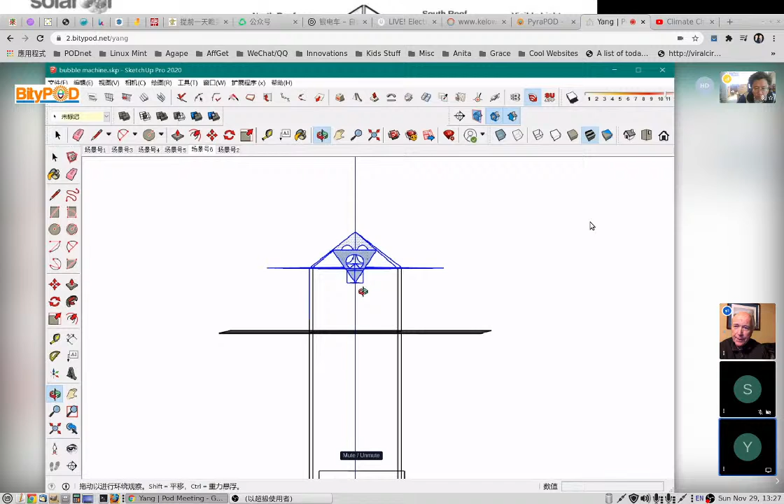I'm ready to go. We ready to continue? Okay, we're gonna do details now. So, Yang, what I'd like to do is copy the structure, everything we see, make a whole copy of it, and if you take the whole column, it doesn't matter. We'll clip it later. Capture everything and the columns. Let's make a copy of it and put it beside. Don't do anything else yet. Just make a copy.

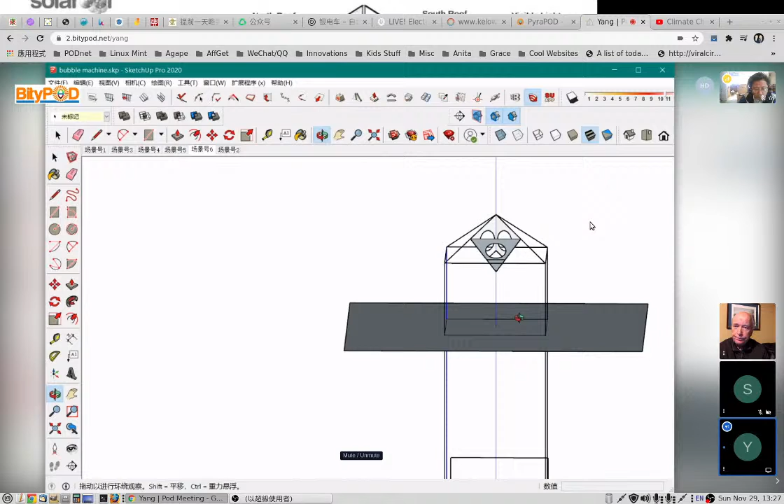If you want to trim it there, that's fine, but only to make a copy, right? We're not going to actually trim anything. I want to keep the original model too. I don't want to undo anything. So if you capture the columns, we can trim them later. Yeah, that's it. Put them over by the side.

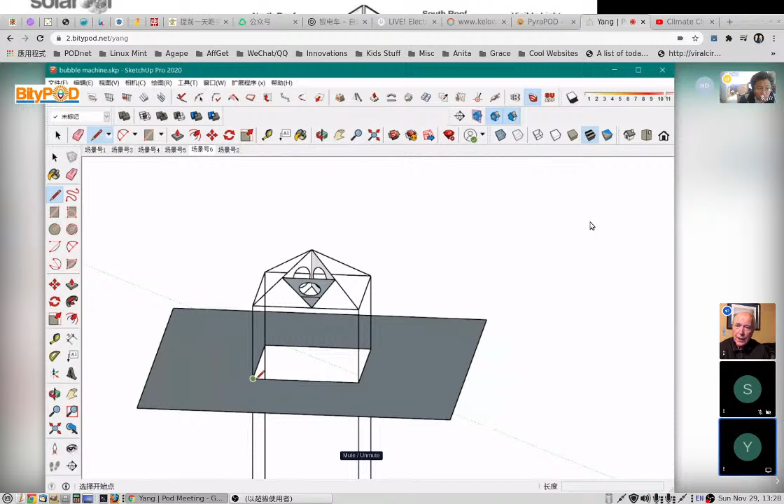Now you can trim where they pass, down past that plane, so the plane would now have a hole in it or anything. Yeah, that's it. We'll just crop the column length so that's all above. So that would now be the floor, right? This is like a table sitting on the floor. So this is the floor? Yep, that'll become a floor that we're standing on while we do this work. We have a little rig, a little experiment, an experimental bench. It's like a bench.

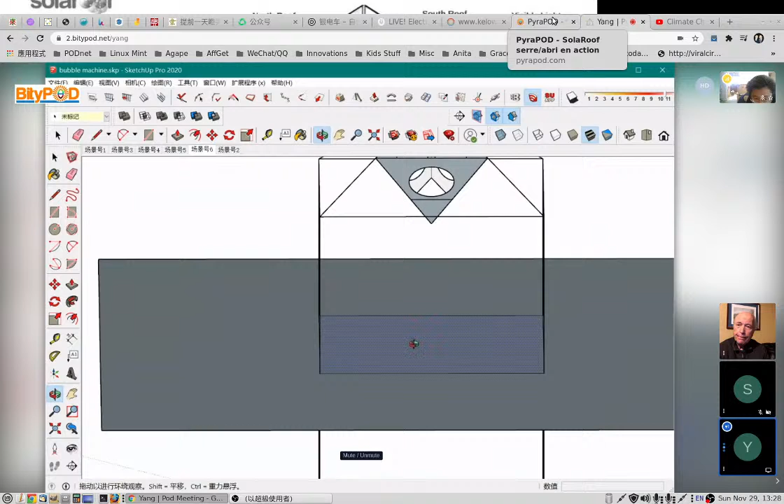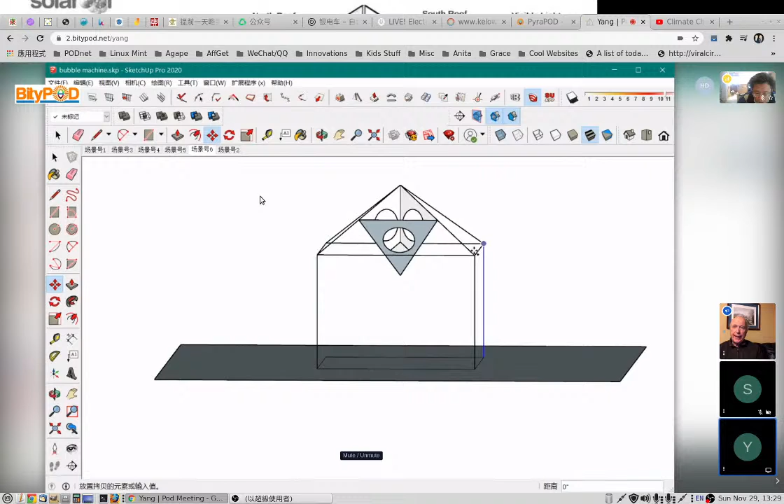Let me erase this first. Okay, we can just extend legs. We could actually give a material now to those legs. Let's make those legs angles, 2 by 2 by 1/8 angle. So like this? Yep. 1/8 thick, 2 inch by 2 inch. 1 inch less.

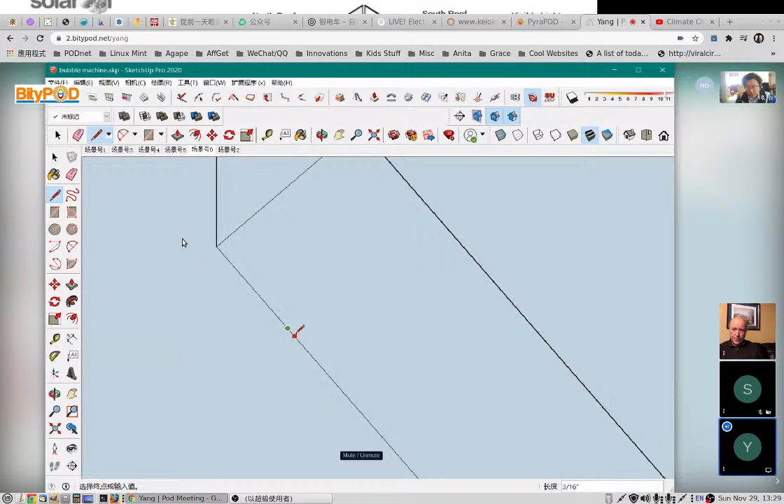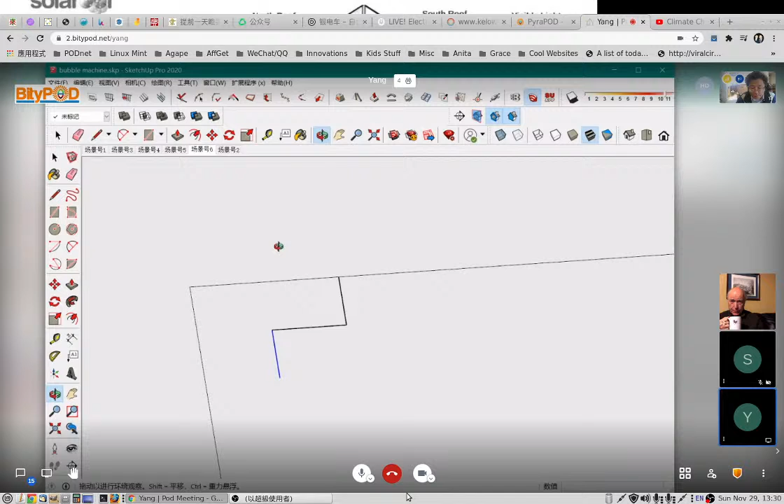So that looks like a two by four, right? Oh no. Okay. The thickness is 1/8, so it's an angle. 1/8 inch thick. And the other one, both legs, 1/8. That's it. Good. 2 by 2 by 1/8, and we can extrude that to make the material up to the base of the pyramid above. Yep, that's it. And then we can put them around for the four legs, same way.

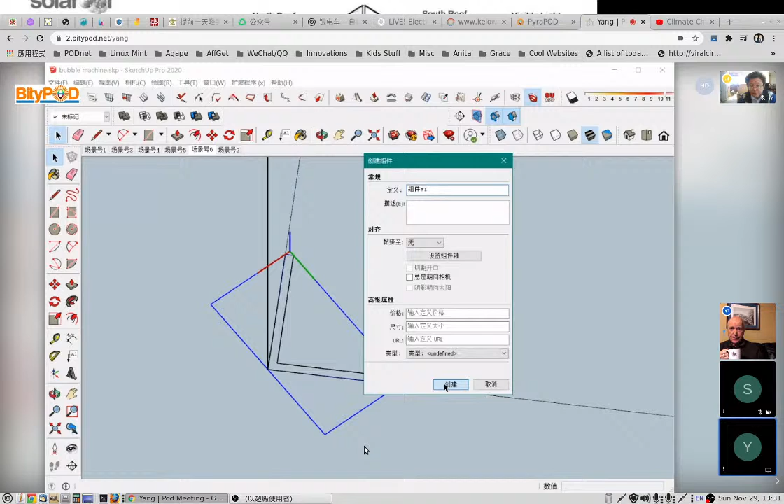And then at the top, I'd use the same angle and make a corner for the tabletop, like a miter cut, like a picture frame. And we can hang the 2x2 over the leg. The flange will go on top, it'll sit on it, we use it like an edging, like it sits on top like that. Oh, okay. So it's a square or something? Yeah, it's the same material. You can use exactly the same material.

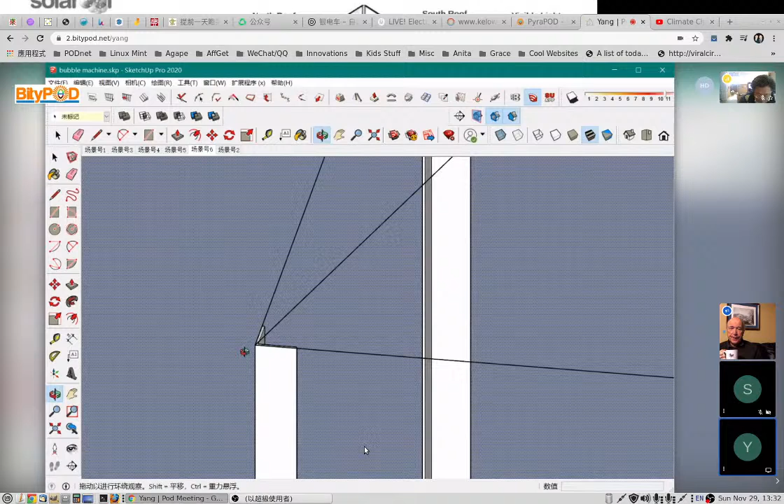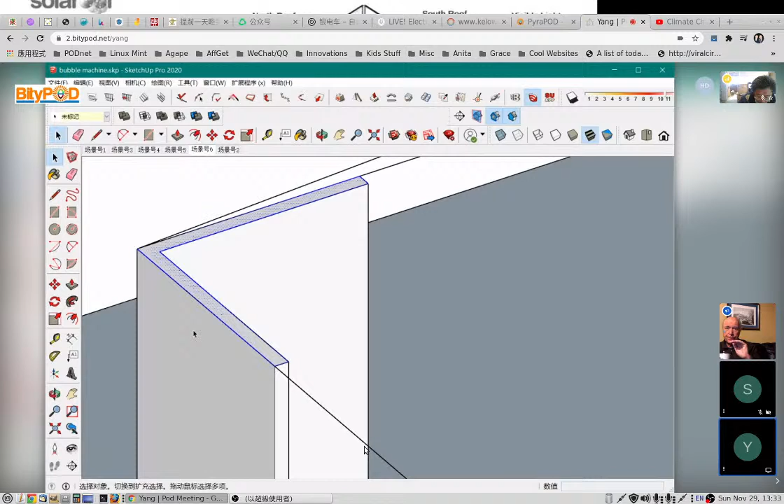So, in fact, you could take that same material and just rotate it horizontal. So same material and same shape? Rotate it horizontal, and then we'll fit it over, so it'll hang on top of the leg. This way? I can't quite see. No, swing it, put it over the top of the leg. Horizontal sits on top, like the edge of a table. Oh, so you sort of hang it on the top, like this? Turn it horizontal.

Rotate. Oh, rotate horizontal. Which is the point? Just turn it. Turn it from this point? Yeah, pivot there, horizontal. And what's the angle?

To me, the cross section still looks vertical. When I rotate it, yeah, that's it. Rotate it so that the cross section will become a horizontal cross section, and you'll have to move it out a little bit and rotate it in the other dimension, okay, in the Z dimension, comparatively, you know what I mean? It's like, yeah, push a leg.

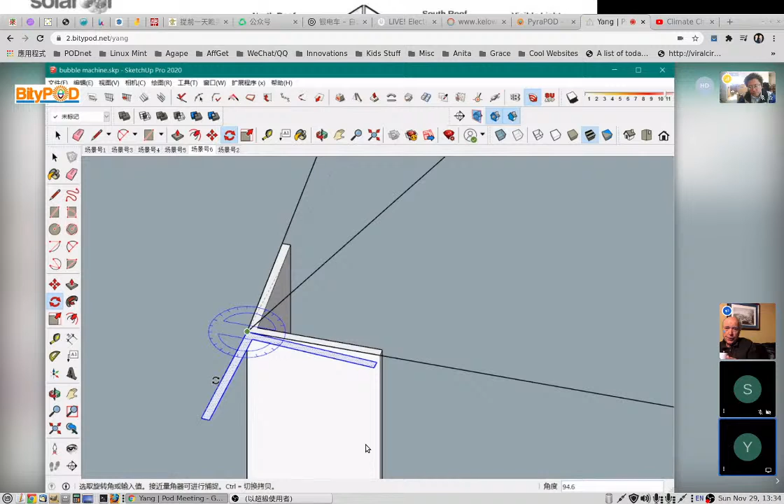So if I could take that piece, I would just turn it horizontally. Right now it's vertical, right? Just take that piece, tip it horizontal. So basically, you are trying to build a beam, right? Well, yeah, it's an edge. A beam from the tip of the pyramid to the base of the pyramid? No, it's just the edge of the top. Yeah, we're creating the base of the pyramid. Basically, you make the connection from the tip to.

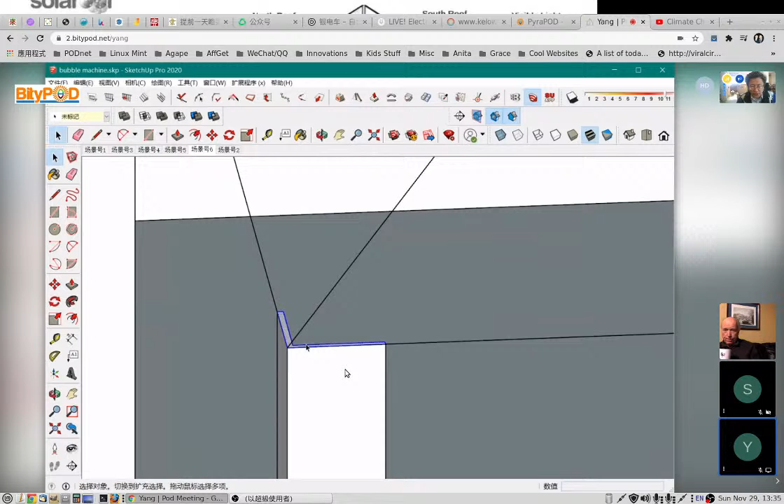So just take that piece, right? Right now it's vertical. Lay it down horizontal on the floor. Just lay it down on the floor, horizontal. So rotate it from the bottom, let's say. Lay it down? Here? You tip it over on the floor. Yeah, just as it is.

Just make a copy of it. Don't make it bigger. Oh, okay, it's the same size. You're zooming in, put it somewhere. Okay, and then what? Well, rotate it this way, on the horizontal plane, the leg to the left.

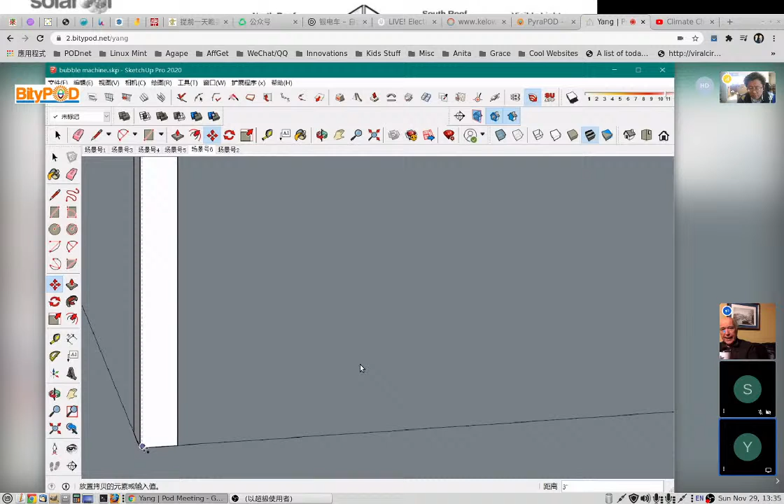Can you move the whole piece? So can you take the whole piece over on its, you know, rotate to the floor? Well, I don't know, you haven't really rotated. So you want me to rotate it. Let me find the surface first. Yeah, so lay it on the floor. You see the floor or the plane. We're going to put it on its edge on the floor, just rotating it. Here? No, no, that's not it.

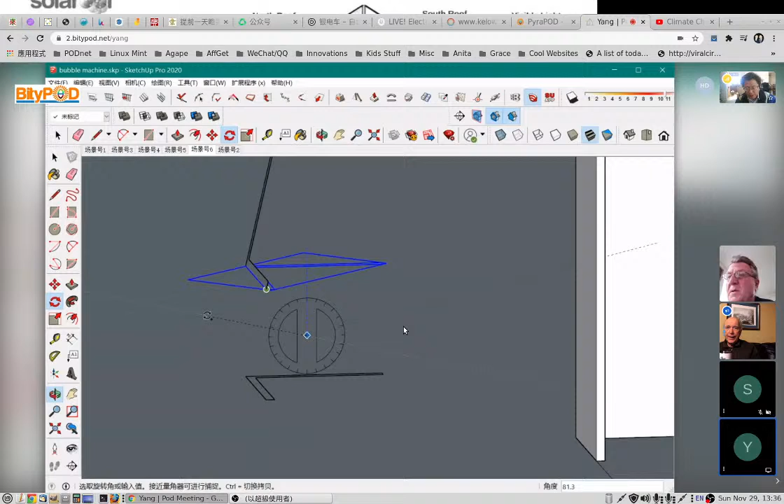Move this leg, move it downward, rotate it. This surface up, right? No, I'm not talking about a surface. Yeah, but it's the same thing. If I want to rotate, I need to find the surface. So this way? No. You're missing the rotation that I want. I don't know, this is frustrating.

So basically, you want to create the same thing, just laid flat on the ground, right? Yeah, that's what I'm saying. Think about that piece as a piece and just rotate it. So look at where the edge of the table is. That's where I want to rotate it to. Not the bottom, well, it could be at the bottom as well. But we're framing the edge of the table with the same angle, like a picture frame, all the way around.

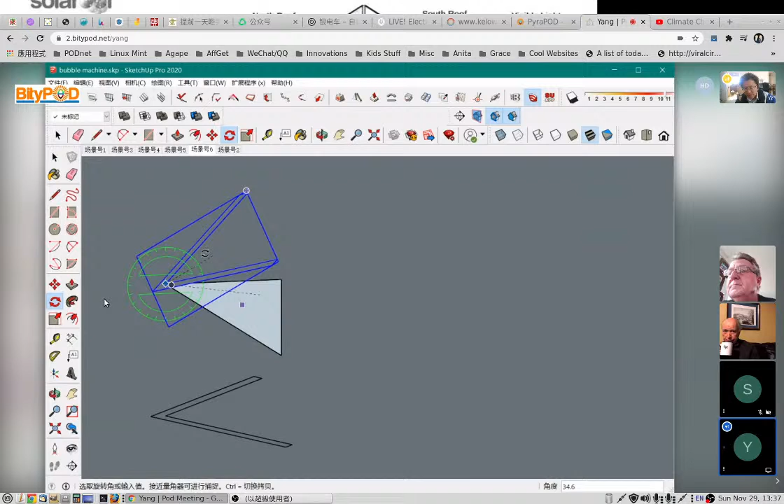He's talking about the horizontal side, the horizontal lines of the table top. We thought you were talking about the slanted edge. So tip it. So maybe rotated this way? Well, yes, that's a beginning. Now rotate it around the z-axis, try the z-axis rotation now. There. Okay, now move it in, so it'll be over the leg.

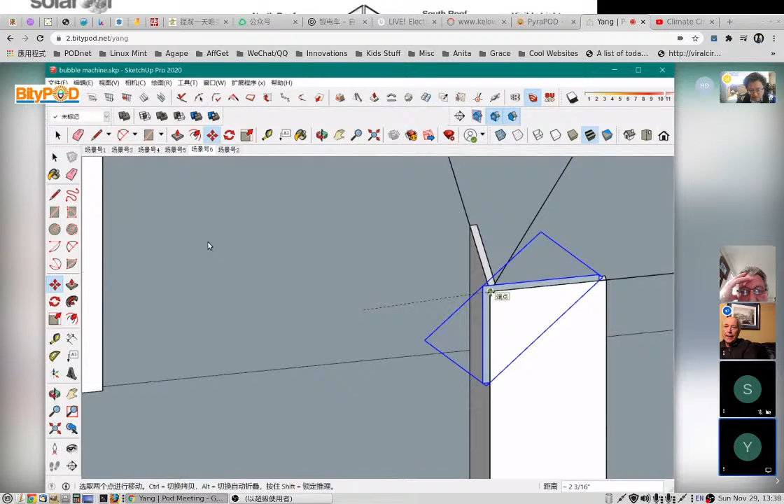And extrude it in the depth now. Extrude it that way. Here? Yeah, that way. Okay, good. So that's what it is all the way around, like a picture frame. We have a miter cut. He's talking about the horizontal edges of the table. Sorry, sometimes it's just hard to. I thought you wanted to do the slope.

It's the edging of the top of the pyramid. And here we bring them and overlap them completely, and then take out the interference. It'll be a corner cut, a miter cut, from corner to corner, like a picture frame. So like this? Yeah, that's it. From the four corners? Yeah, all like that.

Okay, so that's a basic table, right? And you see we've got the overlapping arm of the angles. We can put little bolts through. We can put a little fastener, maybe a self-tapping screw, whatever. We can put an angle in, like a bracket, into the corner for stiffness if we need to. Yeah. Look from the bottom. Yeah.

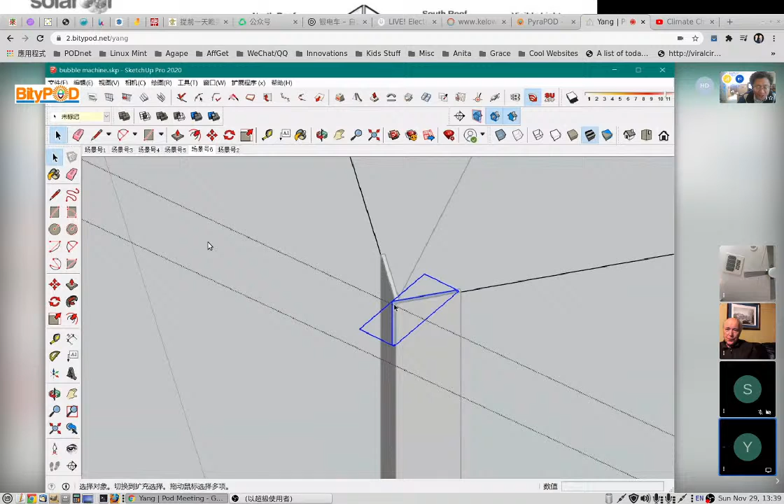And look up in, see where you could put an angle bracket, a right angle bracket. Right in the top, so it lays up against the top of the table. You see the edge, so it fits into that corner, a right angle. Flat, this way? A flat plate that fits in there, up against the underside of there. So this way?

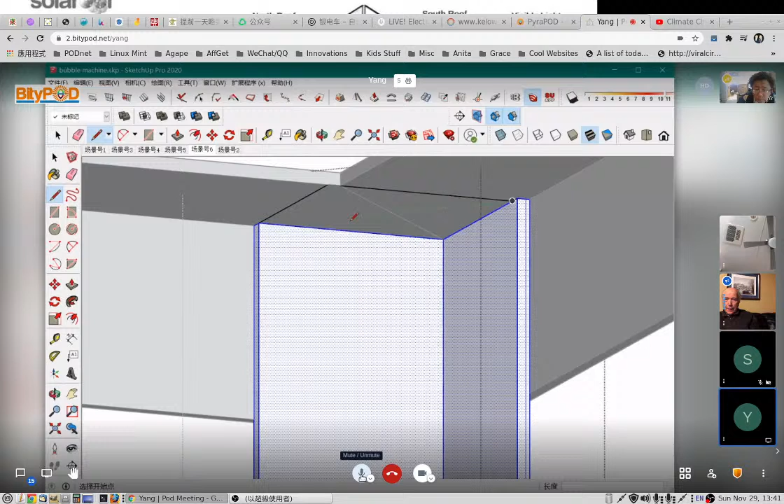Like a plate? Well, not exactly like that. I would say, okay, extend arms outward to each side a little bit. Here, a bracket. It's a flat bracket this way, corner. No, not that way. Pull horizontally, not vertically. Yeah, pull the plate out horizontally, on both sides. Yeah, pull that edge. Oh, that edge.

Right. That's it. And then make another arm. So this is an angle flat plate. It's just to reinforce the corner. So just like this. You had a good start. Pull out one edge, and then pull out the other edge as well. Pull that out an inch or two, a little longer. A little bit more. Yeah, like that. And now make a similar pull out the other direction.

Yeah, and see that's a plate, right? And it's a bracket. So you take that square out. See the square? We could just remove that. And see, what we've got is a reinforcing plate. You can buy those things, right? This is a corner bracket, from the hardware store.

Okay, so now you see how it's fastened, right? It's very strong. It's got a leg. We can fasten into the leg, and so we've got a structure. Now we just need to do the pyramid. Remember when we did the PyraPOD 8, we used an I-beam. This time we won't use an I-beam. I'll use a T section.

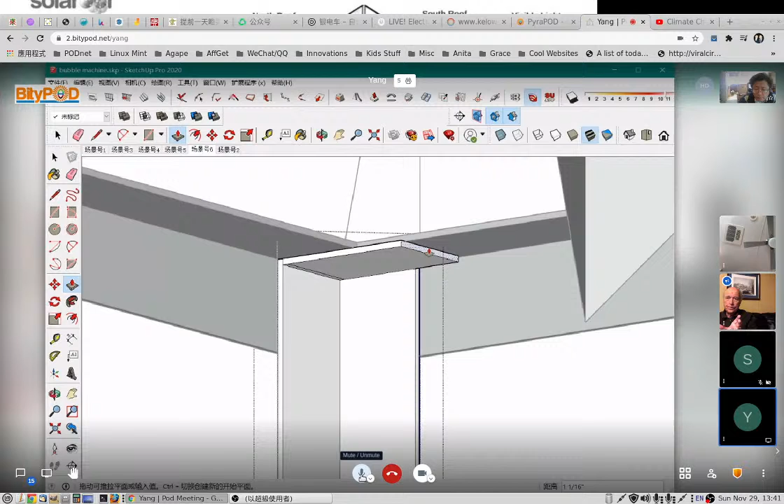The same material? So the section of the I looks like a capital I, but the section we will use this time will look like a capital T. That's the look of the cross section of those edges of the pyramid. So we can create a T if we look right on the cross section of the line. So what's the size of the T? Okay, 2 inches across at the top of the T. 2 inch.

Hello. Hi. Can I come out? Okay, I'll come out. Hold on a sec. Maybe you guys can do this. I'm just gonna go for a minute.

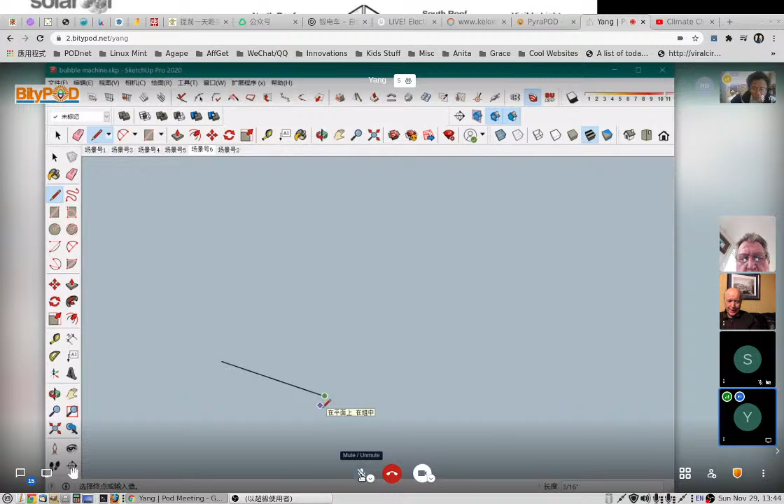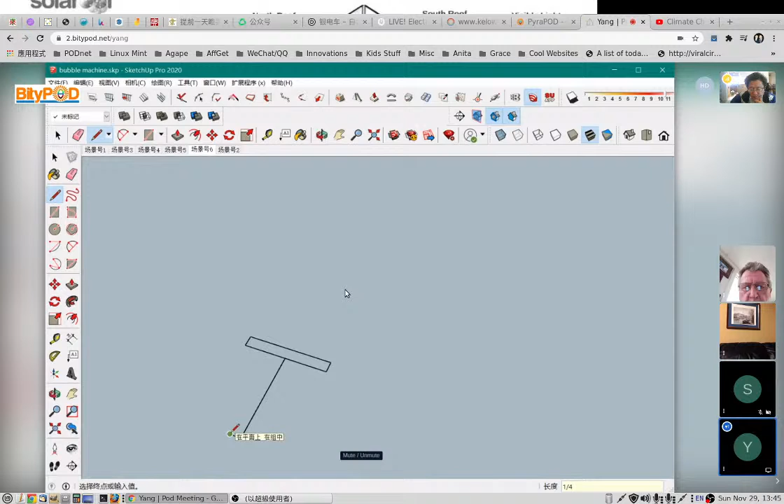So basically the T. Capital T. T may be stronger. I thought he's gonna use L. You know T, right? Like this, and this way maybe 2 inch, and 1/4. Something like that, maybe. In the center, yeah. Is it in the center? Oh yeah, it's center.

T like this. It should be a stand-up T. Yeah, move it. Stand up. Why T? Oh, I see. The reason for that is just so that the bubble generator can fit. Well, if it's an L, why not use L?

So pull the T. Yeah, pull the T, but then the T should drop, right? Should be lower. Let me rotate it. But that should be even lower, right? Yeah, okay. Gonna drop, pull in. Oh.

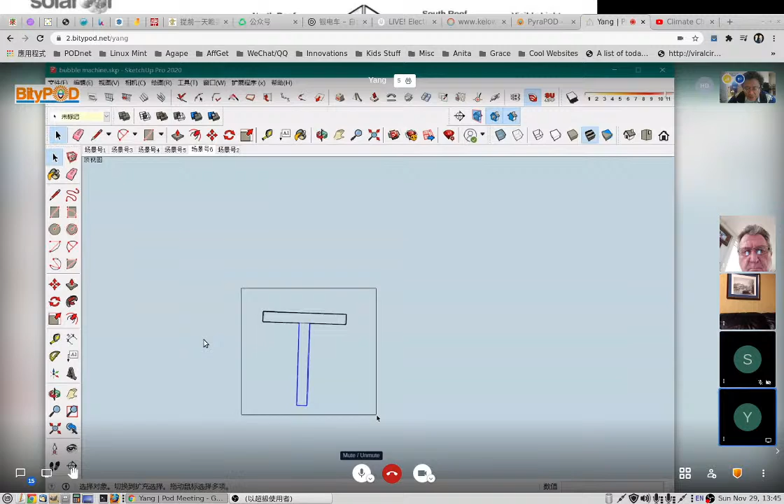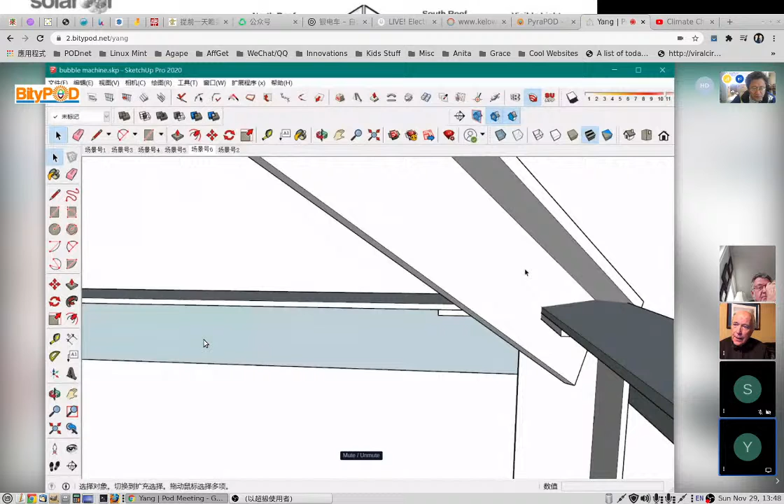So why don't you use the corner? No, because this will be easier to put everything over and make the connection and so on. Yeah, flat. You got some flat surface to work with. I see. And also it's like centered, right? Right, centered. Nice and symmetric. And it's a little bit like the PyraPOD H, you know, but it's a T instead of an I. Yeah. So in some ways we'll have some similarity.

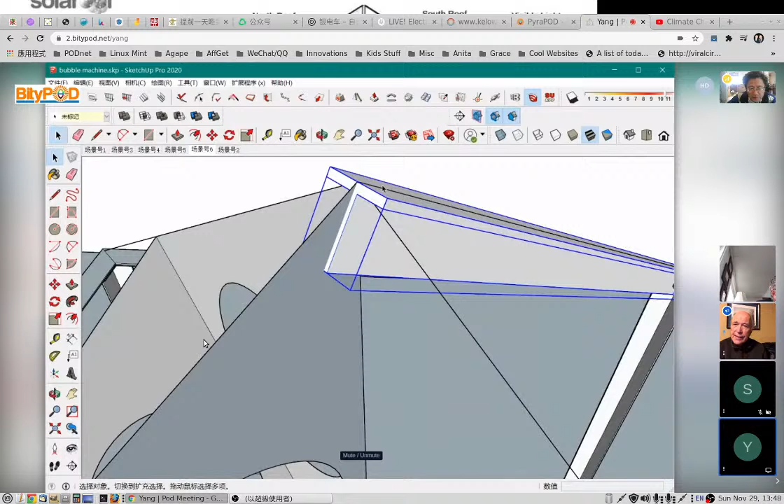And you know, we never really designed fully how the bubble machine would go in the PyraPOD H. So we're going to probably learn about that when we build this one. Yeah. There will be kind of similarities. So how does the T connect with the frame, like the table? So, what we could do, I would say, we'll have to look for a reasonably simple way to fit it and make it. Corner cut. See that corner.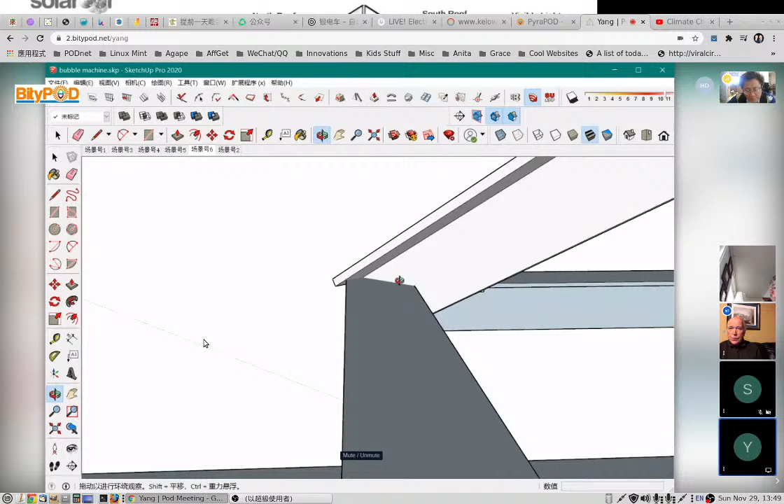Maybe what we do is we sink it down a little bit more so it comes right on the edge. You know what I mean? Push it more into the frame below. Lower, into the frame? Push it a little bit more into, yeah, like that. And see how it looks from the other side. See, it's going to go across that corner. I'll tell you what, we need to cut that corner off, actually. Well, I'm not sure, because it depends on how we cover this. So maybe move it to the corner? About like that, yeah, that looks about right.

But then we still have to make our connections for the tabletop, so I'm not sure if we can just cut that away. I think the whole corner comes apart. Yeah. But let's say we can just fasten the T section to the corner like that, and we'll figure out later how we're going to fasten it. There's gonna be a way that we can tie that, and at the top we can use the solution we had before, right? Remember the brackets that you already designed for the I-beam? You did a nice bracket at the top.

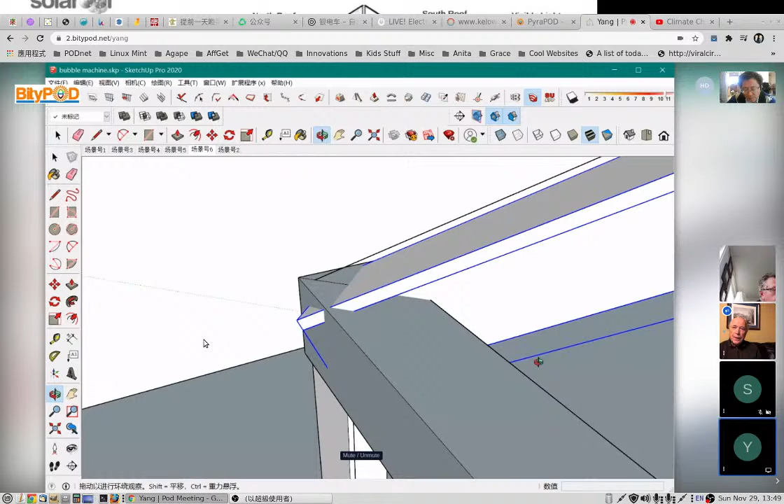Yeah, so maybe it can fix like the corner. So I'll put the top of the area like we did before. It's the same kind of cut that you made with the I-beam. Turn this 90 degrees, times 3. And cut from here to here. Oh, okay, from the top. And from the bottom, you can just cut here.

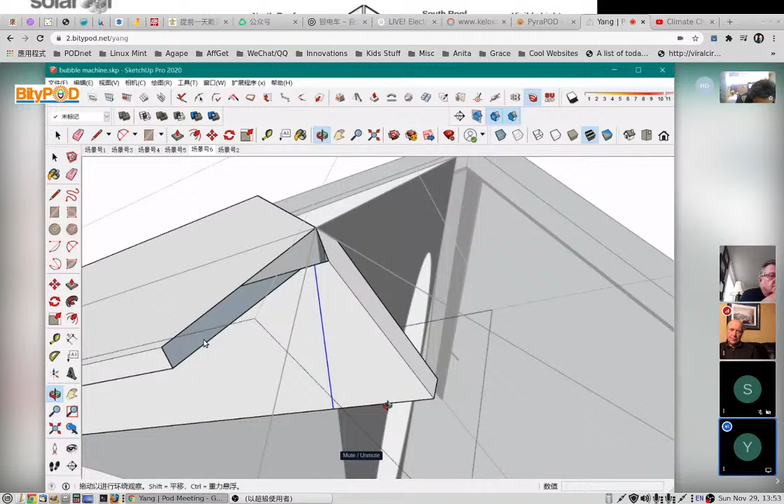Okay. If that miter cut is too complicated, you could even have a little square gap where they don't necessarily have to meet, if you cut straight through. And it's okay. So we just delete this part. So the top could close, but we could have a little square gap where they just kind of meet, but they're not miter cut there. Because it's very small, right? It's only a T. It's probably 1/8, right?

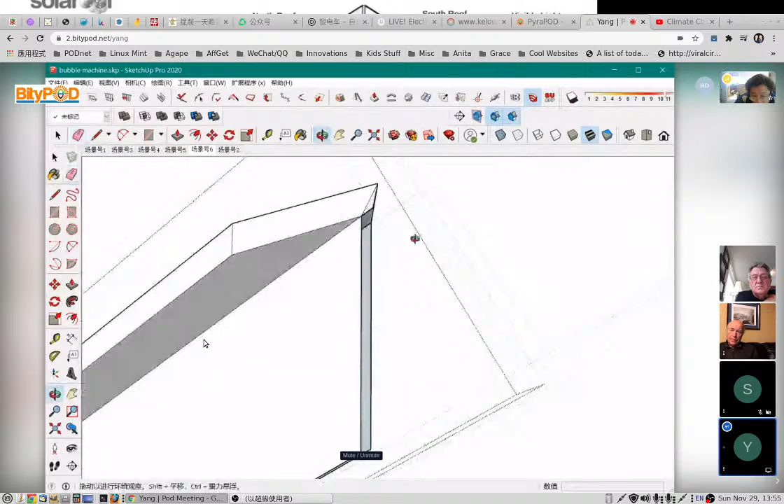It's 1/8 inch. So it's a tiny square gap where the legs of the T meet, but we can't make them fit precisely like this. This is the section. We just cut here, one cut, and here, one cut, just like an arrow. And it can be connected together, it fits together. And then we have a bracket at the top, like you made before for the I-beam. So it's the same kind of thing. We have 4 brackets that go in, and we can bolt them at the top there. Okay. You can do it later.

So now with that leg of the T, when we look at the bubble machine, we see the sides at the top, and how they can fasten to the leg of the T. We fit the bubble machine inside, just inside. Now we have an interference. So we shrink the bubble machine just a little bit so the sheet metal is against the edge of the leg of the T. We can fasten it to the leg along the top, and we still have an open top, but we can reach inside the bubble machine.

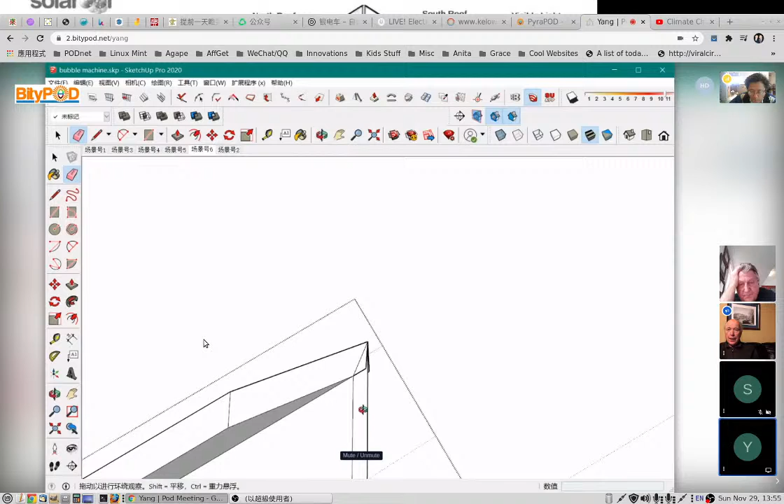And we just take the body, the bubble machine, and fasten it along the top there. Okay, I'll just delete the rest. Yeah, that's it.

Don't need that one. So in one of the pyramid faces, one of the quadrants, we have one bubble machine. In the proper model we'd have one on the opposite side too, we'd have two bubble machines, one opposite, but we won't bother with that right now since it's just a mock-up, and one machine is sufficient.

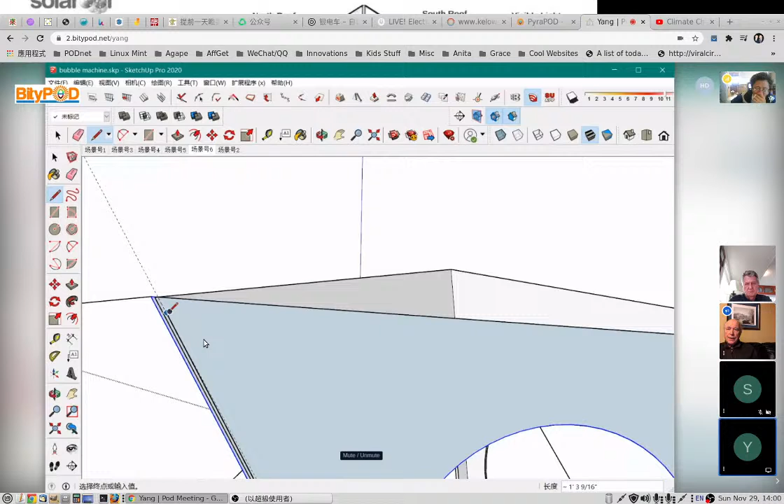Because we're going to fill the entire space, we're not going to make a bubble cavity. So there's no bubble bag, we're not blowing into a bubble bag, we're just blowing into the space. This is easier for testing, right? Yeah, this is for testing, this is nice.

But we have a complete bubble screen, so we still need the bubble screen and the details for putting the bubble screen in. The sheet metal maybe 1/8 or 1/16. 1/16, quite thin. So let's see how to make it.

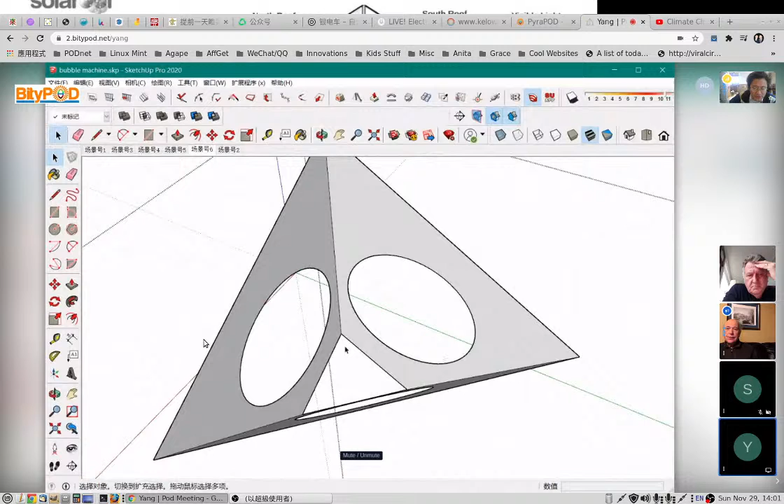Yeah, that's great. And the bottom is kind of open, and we'll have some kind of part that we can fit on the bottom. That's really like a funnel to drain the liquids out of the bubble box, right? Because we'll have surplus liquid that's not going to go into the bubble making. It's going to be draining, and from there it just goes back to the reservoir.

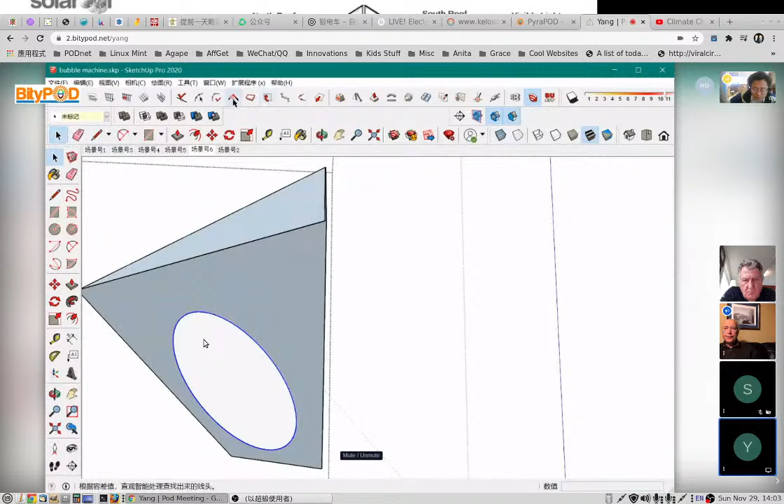Okay, so you have the thickness. That's pretty good. So now, to do the bubble screens, we do them the same way. We put a collar into the hole. Remember how we did that? That circular collar, like a cylinder, that just goes into the hole and extends a little bit out and a little bit in, right? So it's just like a cylinder, same diameter as the hole, thin wall, and it's only like 2 inches long.

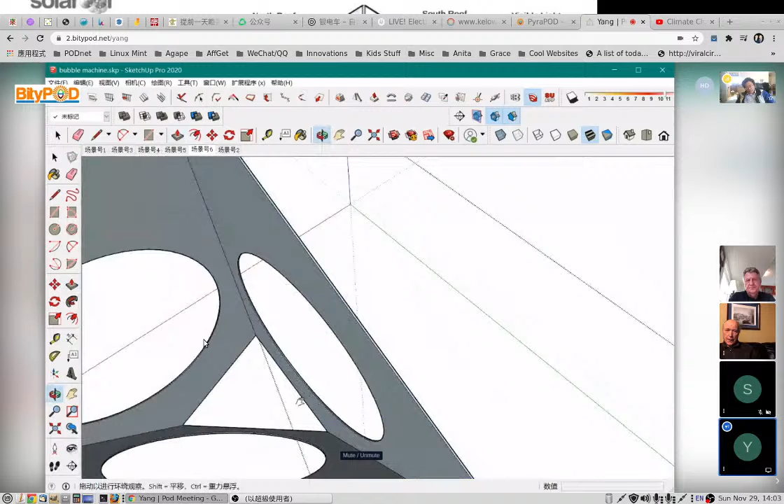And it's a little bit thicker, yeah, quite thin. It's also like a sheet metal or polycarbonate, some kind of thin sheet material. And that cylinder fits inside the hole, extends inside about 1 inch and outside about 1 inch. So it's about a 2-inch collar, and it's positioned in the middle of the wall. Okay, so let's go half in and half out.

And that's how we put the screen material. The screen material on the inside is basically mounted on the inside, and it's like a jar, like the top of a jar. It's a cap that presses over that collar. Is it inside or outside? The actual collar is on the outside of that one, of the screen. The screen itself is carried on another collar that's just a little bit bigger, and it's slipped over this one, and it trapped the screen material.

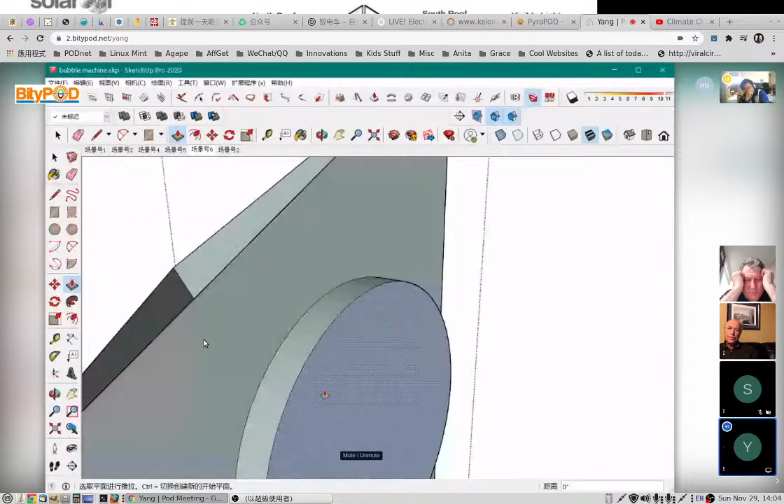And the screens can go over the collar. So we have the bubble box, right? We have a way to fasten it, we know we can make it from sheet metal. We have the screen construction, and we have the opening for the fan. So now we could search for a fan unit that can fit into that hole. So the hole is ready, to the diameter of the hole now.

Considering the table is 4 feet, right? What's our diameter there? Diameter is 10 inch. Well, that's about right. I'd say 10 inches is a reasonable size.

So what we would look for is a fan unit that includes the fan, the motor, and what they call the scroll. The scroll is like what goes around the tips of the blades, it's the guide for the air to come in. So you can get a fan unit that includes all of those pieces, and it simply fits into the hole. There needs to be some mounting system to hold it properly, but we have to see what the fan unit looks like first.

So we pretty much have the basics, right? Maybe you can just forget about the inlet, we can just design the nozzle and the motor. Once we've got the rig - this is like the test rig - once we get the rig established, then the details we can modify.

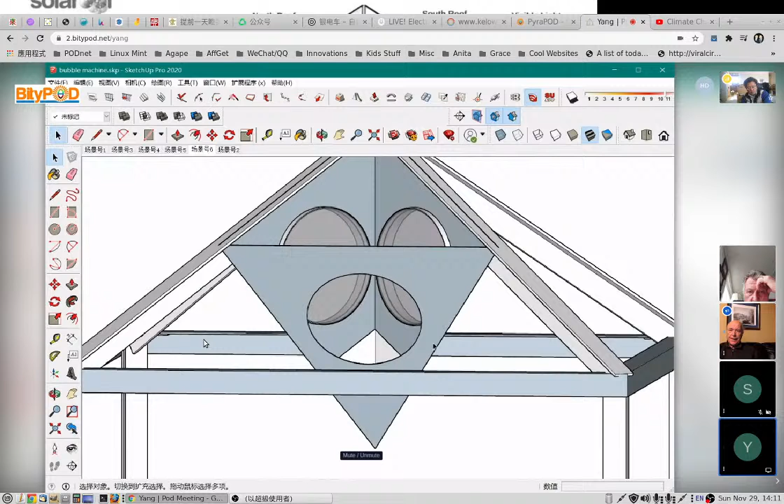We can try out different fans, we can try out different screen material. This is kind of for experimental use, to learn about the bubbles. The main components is that we move air and we spray water. The nozzle has to be in the right position, at a certain distance. Once we have the test rig, we can design details because we can do it experimentally.

We can get some - we could even close one of those bubble screens, just put a cap over it. We could try with one screen at first, just to get a nozzle, get a screen, try it out, then we replicate it. And we see also, can we push enough bubbles? Because we want to push bubbles into the adjoining panel, so we need a strong fan.

And we can experiment to see that we've got it right. We can also do some calculation - how many cubic feet per minute do we think we need? What would we aim for? So that we could get a fan unit that will give us the right CFM. It should be a sealed motor that can be wet.

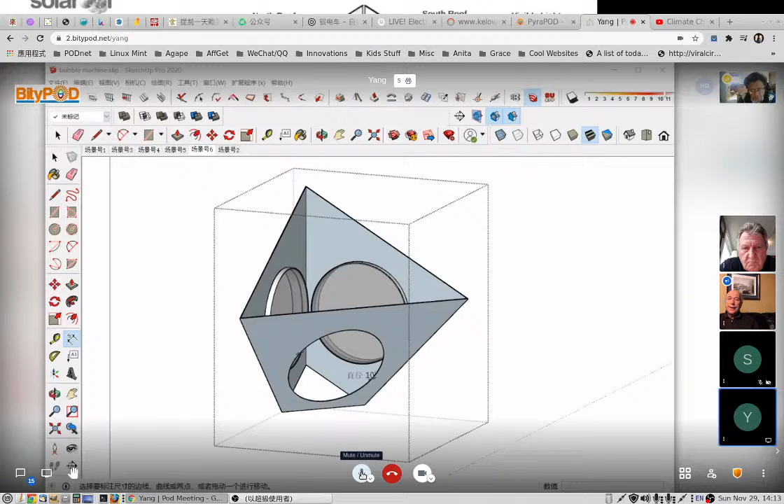But that one we saw for the Mercedes had two fans, but there was only one that was powered directly - the other one was powered by a belt. So we might be able to use a fan unit and just have one of those. But I'm not sure they were 10 inches - this is pretty small at 10 inches compared to automotive radiators, which are probably 20, a bit bigger typically.

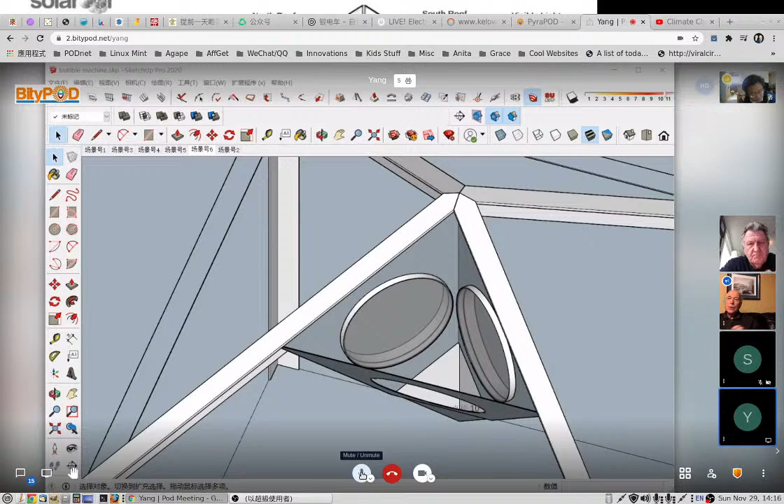20. Another possibility is we can make this bubble box bigger, right? We designed it now of a certain size, but what if we move the inner, you know, the fan wall further away, right? That's right. Further away, down, then that's bigger, make a bigger bubble box. We can get a bigger diameter.

You know, the depth of the cavity is 2 feet. So it could be that almost the top of the pyramid is used for the bubble machine. That's right. The pyramid, the cap. I don't expect the bubble machine needs to be that big, like the whole top of the pyramid. No, I don't think so. But we could make it a little bit bigger if we want to. Yeah. Well, that's the idea of a test rig, right?

Now, over the whole thing, we put a kind of a tent, a cover, right? We could sew it up to fit, or we could weld it. It could be welded with like PVC, clear material, so we can really see inside, right? Yeah. And we could still have like a clear top cover to the bubble machine. That's really useful. We can reach inside.

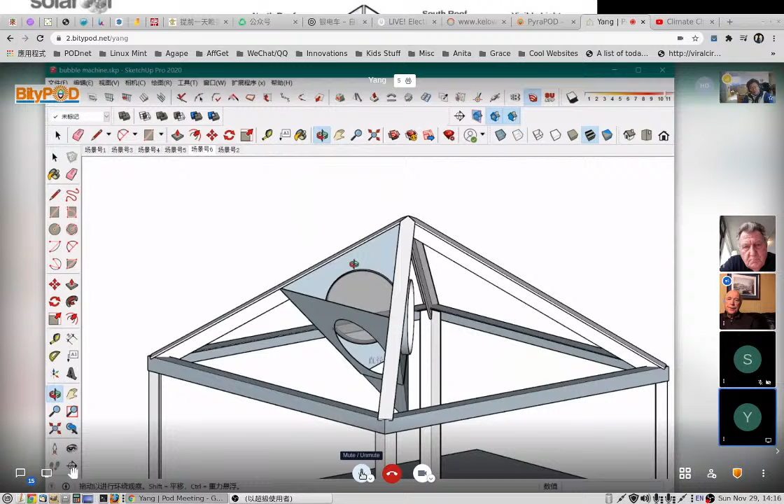Another possibility is we get polycarbonate sheet material, and we just lay it down on top of this, right? We fasten it, we maybe glue it, or rivet. Polycarbonate can be quite thin material, and we could rivet it onto the T section, right? The T's. So we could make polycarbonate sheet material, 3 triangle cutouts, and we fasten them on there to close up the top part, all clear, so we can really see what's going on. We look inside and see underneath.

The bubbles will come right up against the clear material when it fills completely. So we'll see the bubbles really nice. We can take a lot of nice photographs. And the liquid can just drain back down into the tank below. Now, we haven't drawn the tank. This is very simple. We need a base at the bottom of the table. We need a basin.

And that could be similar to what we've built, but just like a pan. The table thing is standing in the pan. Maybe we make a sheet metal pan. Galvanized steel. Or use something to support it, and use a pond liner or something. Yeah, pond liner. Because it's just for testing. Yeah, it's just for testing.

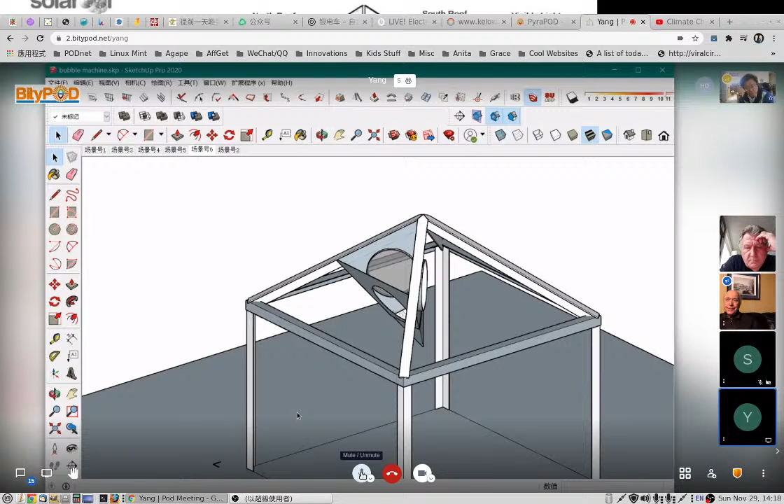You create a void by turning any kind of, like a barrel, a pail, upside down, and then you hang the ice cube inside. Well, you could do that too. You could put the ice inside that cavity. Yeah, I like that idea because then there's no interaction between the bubble and the ice. Oh, that's an idea. Sure. I mean the ice, the air...